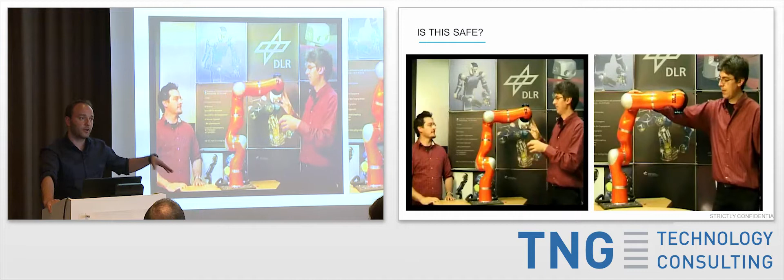And the problem was that there is no robot that can give you force feedback. So did you actually turn the lever? You could not give this response. So the idea was to create a robotic system that has some sort of force feedback. And the first application, what you see in those videos, is now copying human abilities. And human ability is behavior. So we can suddenly create not only a position, a stiff motion; what we can do now is to make the robot compliant, or you can make him stiff. And all that by control.

The problem that actually arose from this video, one of the first videos that showed a robot and a person in the same workspace, right? This video is, by the way, from 2006, and this young man is my brother, and I was filming during night time because we were not sure what's going to happen. And that is actually the question, is this safe? This became a much more prominent topic than we ever thought of, and by now we talk about something in German called MRK, Mensch-Roboter-Kollaboration, or human-robot collaboration, which became, under the title of cobots, the main issue. So is this safe or not?

But the idea was never just to make a fenceless robot, but to create a system that is capable of more things, and not just to remove the safety fences. But obviously that is a very critical thing. So what was the next step? The next step was to introduce robot reflexes. When you put your hand on a hot plate, you do not need any higher computational power in your brain to remove your hand, you just do it. It's a very rudimentary reflex, a spinal reflex. Without thinking about it, you're going to remove your hand. And basically that is what was introduced into robotics. This is the so-called collision detection.

And what we see here are now high-speed collisions, roughly 2 meters per second, or even low-speed with a knife. We drove here with 0.75 meters per second, and my brother's arm is still functional, more or less. So this was the next step. I mean, copying biology is usually quite useful.

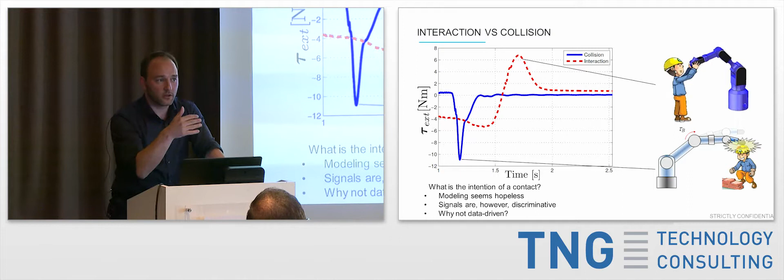Okay, so what I initially quickly said is collision detection is not that difficult. Actually, what you do, you just compare your input with your output, right? All robots basically have a joint which has a motor which gets power, and you have a current sensor on the drive side, so in front of the motor basically. And when it collides with something, an energy peak is detected, which is then different to what I put into the machine. And that's how I know something collided with the machine.

But the idea, as I said, was never just to introduce collision detection as a binary function, so yes or no, because then your robot would just stop all the time. So what we did is develop a torque sensor, a real measurement of the real external torques and external forces, and put it on the far side of the motor, so we can measure the real external forces and external torques. And why do we do that? Is what you see here.

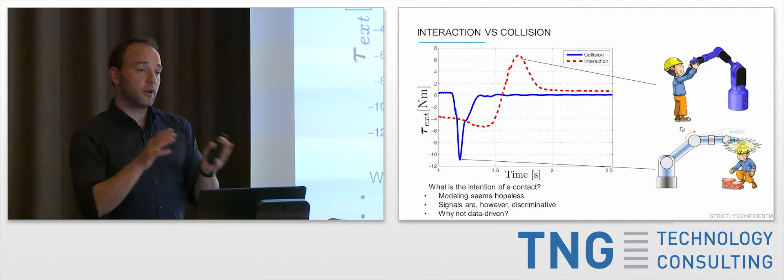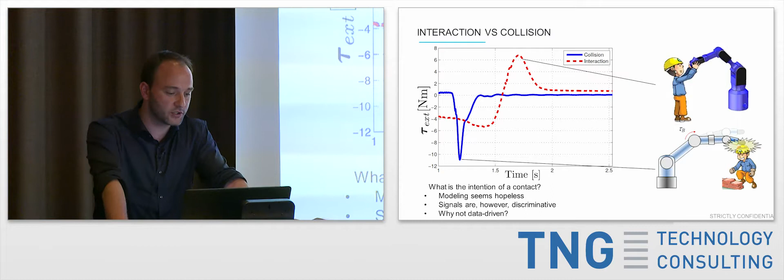And this is now where learning and all the big words that are thrown around these days come into play. All we do in the end is have a torque profile over time, right? Because we tried modeling all kinds of different situations so that the robot would understand whether this is a wanted collision or an unwanted collision. But it was almost hopeless, so we tried with experiments. So data-driven, collecting torque data, collision versus interaction, so the machine understands whether it is a wanted or an unwanted collision. And then I show you the first experiment of such kind.

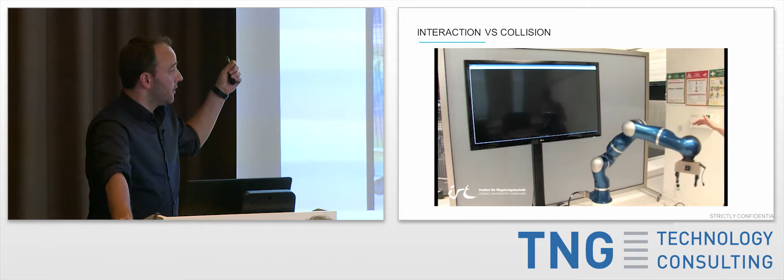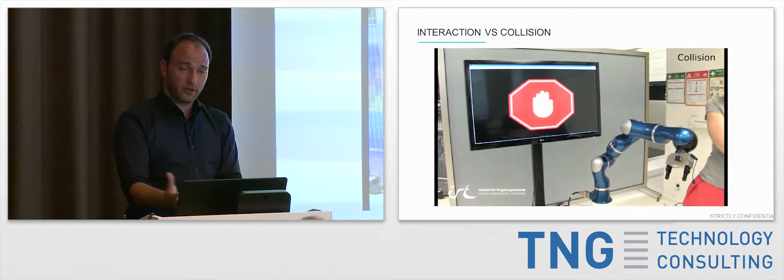So the robot understood now that Saskia was grabbing him with the hand. And now he understood that it was not an intentional collision. And this is, let's say, the second generation of differentiating collisions. Later I'm going to show you, because manipulation, interacting with the physical world, is a constant collision. But the robot needs to understand whether this is wanted or unwanted. Let's say he's used in an assembly task, putting together a computer. It's constantly colliding, but he needs to understand this is on purpose. And I'm going to come back to this point in a second.

So this is our robot, which we developed over the past 6 years. We started mass production last November. And as Marie said, we had been graced with awards from the German federal president, but also in the US, Popular Science or the Edison Award, because what I'm going to show you in a couple of seconds is quite a breakthrough in robotics. So what are the key features of the system? First of all, the usability.

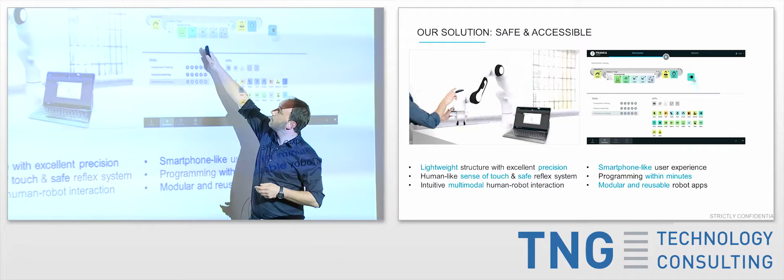What you see there on the right side, you don't write any lines of code anymore. We introduced something everybody knows from the internet world or from classical IT, a hardware abstraction layer. So you do not need to write any code anymore, but we created skills and apps which bundle functionalities, and in the end you just drag them into your timeline and push play. So what we see here on this side are all the apps, just like on your smartphone, installed on this very robot. Here you have the timeline where you put all your apps together, and this is where you can store them.

And what we see here, for instance, is the programming from one of our major cases, iPhone quality control. These functionalities are interacting with the person, opening the smartphone by pushing the home button, putting a calculation into the calculator, and closing the iPhone again. It's a typical end-of-line testing of a manufactured electronic device. So you don't need any special skills anymore to program a robot. And we actually opened up an academy at our place where we invite basically everyone who's interested, who has never programmed or who has experience in robotics.

We have even school children from 8 years old using this. We did a statistical analysis, and what we figured out is that 7th graders are now only 20% slower than a postdoc in robotics at programming this robot. And that's only the relative time - we actually reduced the absolute time from weeks or months to minutes.

2 or 3 weeks ago at Hannover Messe, we made a live setup of the robot. It arrived from an Amazon delivery and came to me. Together with our Minister of Digitalization, Frau Bär, she was actually able to set up everything within 5 minutes with an audience similar to this crowd, even though she was sweating and red, but it somehow worked.

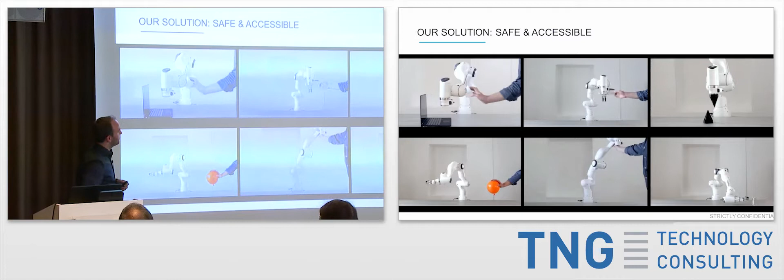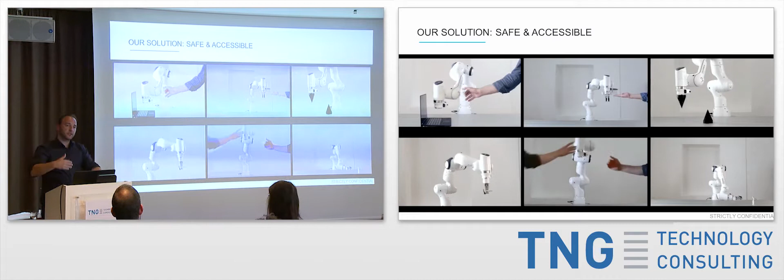Here I show you a couple of cool features - it's a bit older prototype, but was still functioning. What we see here are something called virtual walls. We can introduce spaces where the robot is not allowed to go into, even though you throw him into it. Basically he bounces back, because for instance you don't want the robot to destroy the screen, so you put a virtual wall.

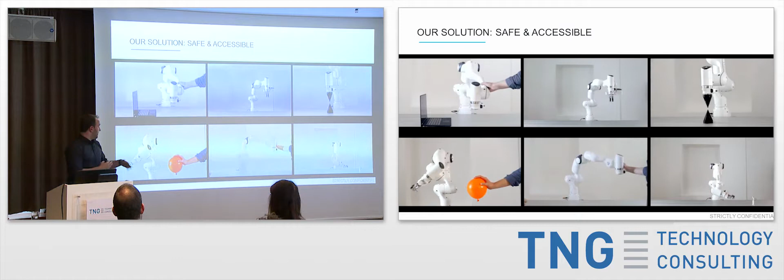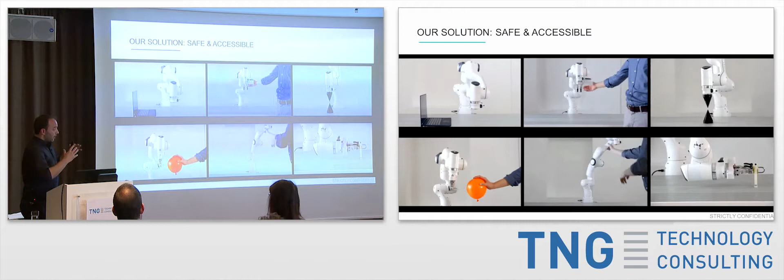Another thing is the sensitivity. What we actually see here on the video below is a nail driving into a balloon, and the balloon does not burst because the robot stops that fast. That is one of the most critical things which a lot of stakeholders going into robotics worry about, because robotics is quite a hot topic now.

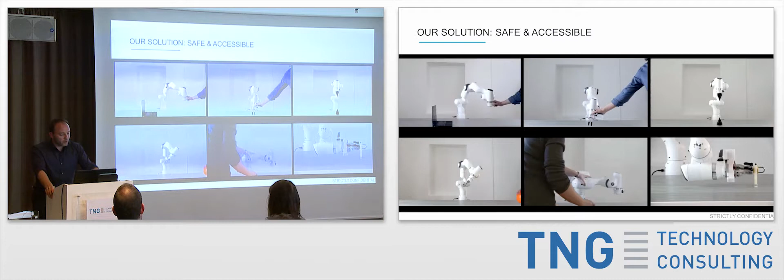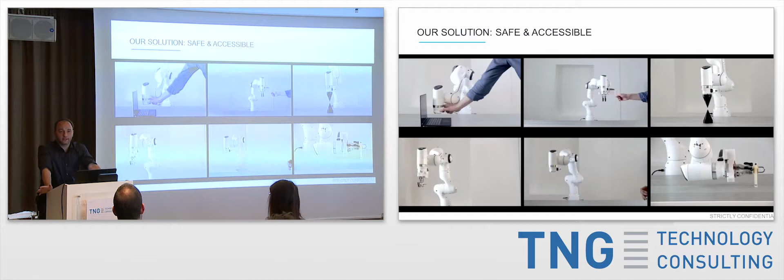The problem we have with real machines is that real time in robotics does not mean, like I saw before at Oculus, 90 frames per second - we were talking in kilohertz at least, so 1,000 signals per second. Why do we need that? It's because the human has the spinal reflex to protect myself - it needs 80 to 100 milliseconds until I can actually react to a danger. That means your machine must protect you in that delta time, otherwise it has no meaning because the human could react already.

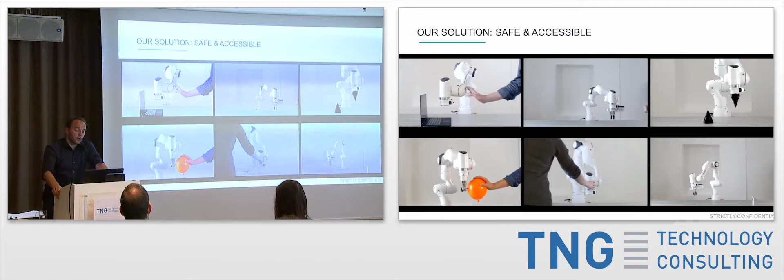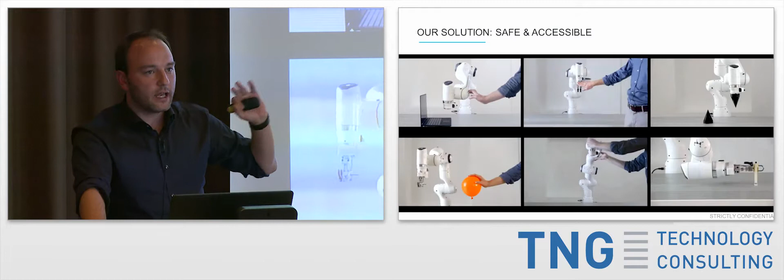Now comes the tricky part - let's say we connect all these robots to some cloud. The problem is still the latencies. You cannot use any cloud connection today which will give you information in the time you need it to react, because we are talking about different digits of velocity or frequency we actually need here.

As I said, that was a prototype, and now I'm going to show you a cool video of super sensitivity with the balloon - this is our newest version. It still works, but what we can do now is blow against the robot, or even throw the balloon against the robot. The sensitivity is so strong that it even feels single grams of contact.

Why is this even possible? We have in each joint, so in all 7 joints, something called a torque sensor, which is nothing else but - when you take your finger and overextend it, you have torque sensors basically in your muscle tendons. That's how your body realizes that you are using or overextending that finger. And that's the same thing we introduced now into robotics.

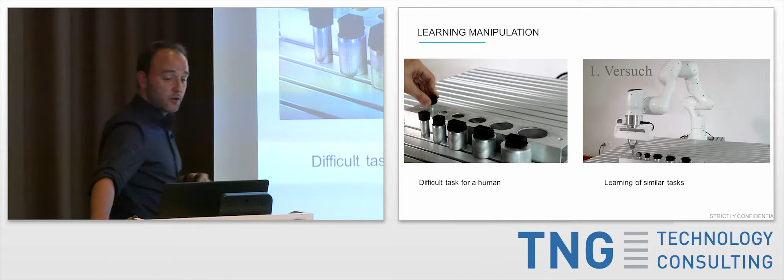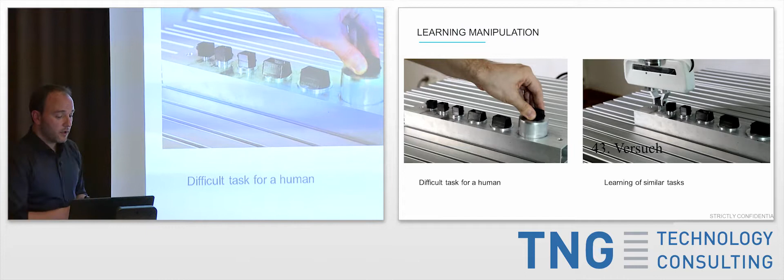What can you actually do now? That's where we come into the nice videos. We can learn manipulation. What we see here now is a typical robotics problem - sorry if the videos seem a bit strange, I have a new laptop and did everything on Apple, you know how it is. This is peg and hole - inserting something that is quite difficult to insert a peg into a hole. You see the human needs a couple of seconds for each of those.

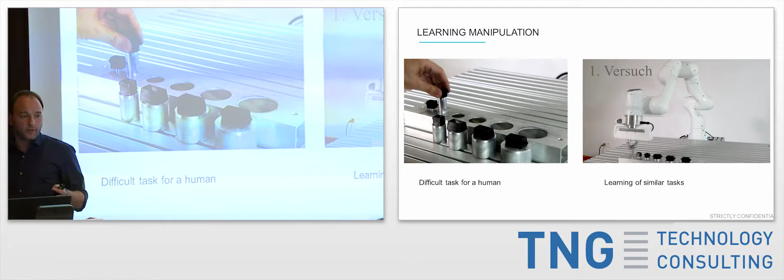What we see here now is that the robot is testing itself. Nobody programmed that robot - the robot is trying to complete this task by himself. What you see is that at the 12th trial, he's already managing. At the 26th trial, he's getting a bit faster.

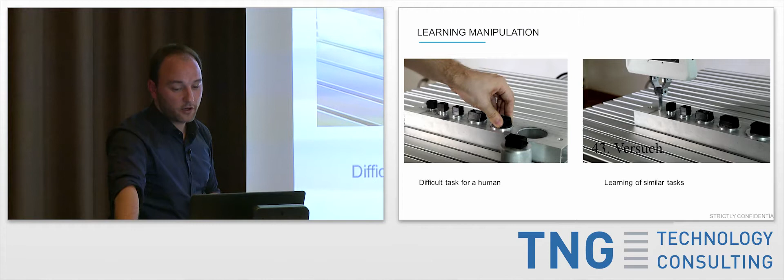And at the 43rd trial, I think he's going to manage now really fast. And that is actually industrial quality. So we can, without anyone ever programming this robot, do insertion tasks without programming them.

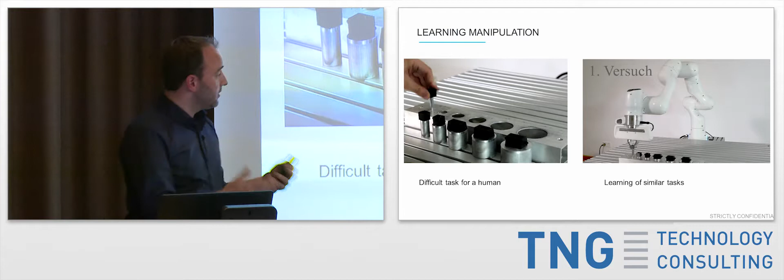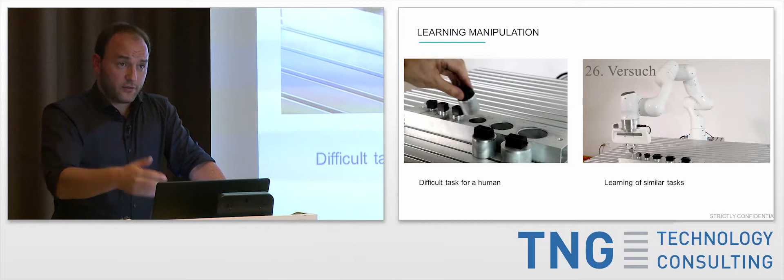And then comes this question of strong and weak AI. I'm not sure if everybody knows, but weak AI basically means I solve one problem, like face recognition, and I can recognize faces, but to transfer that knowledge to a different problem, even a similar problem, is still very difficult, very far from actually happening.

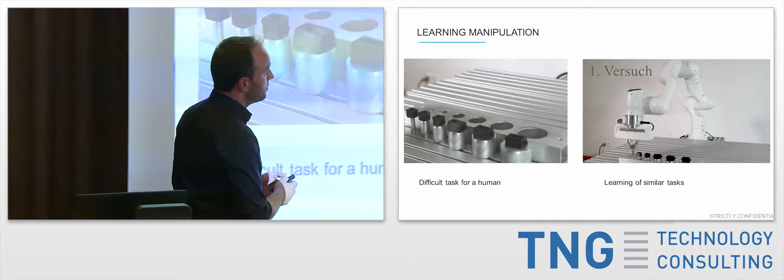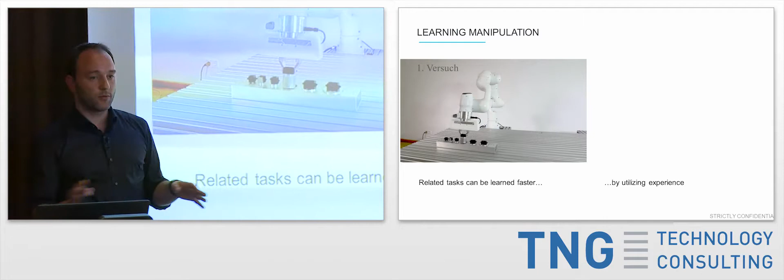We did the very first experiment of that roughly 10 years ago, so the hand you saw initially. 10 years ago we did that the first time, and the human back then was the son of our boss. He was, I think, 6 years old or something, and he was way faster than the robot. The robot took almost 2 hours for this problem, and the son did it in a couple of minutes.

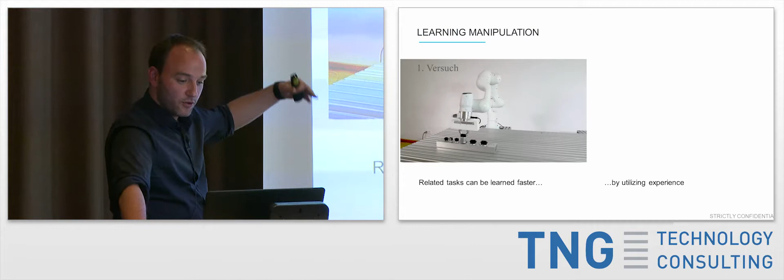So when you have a machine of this kind that is capable of learning manipulation without any programming, he can just try it out himself. What do you actually get? You get a multifunctional tool in the end, which can do things for you that you maybe have no idea how to do, but he can try to solve them. And that is the opposite of automation today. Automation today is 100% special solutions, everything is a single application, and there's no way to transfer that knowledge to a new problem.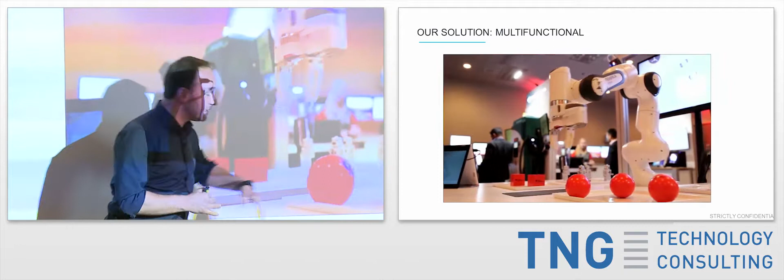I'm not sure if there's an after party after this conference, but if there is, you all know when you get home and you're a bit tipsy and it's dark and you're trying to put the key in the lock, right? You don't see anything, but you will still manage it. And that's what we're doing here, basically the exact same thing.

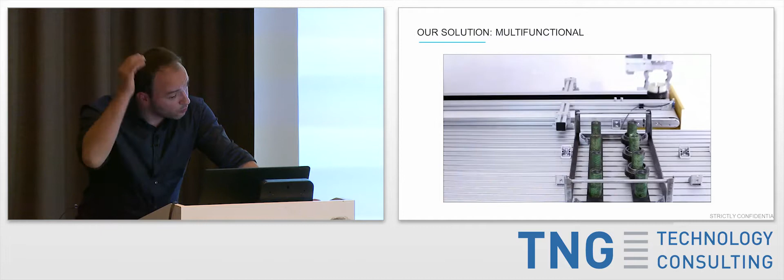Okay, this is maybe important to see. What you see now, the colleague just moved that little tray, and for a normal robot it would be impossible to execute the task. But look at what he's doing now, just like you would do it, right? You're trying, we call it wiggling, so you wiggle the workpiece into the target area.

And the same accounts for a CNC machine, without any issue, so we can use tolerances. The world is filled with tolerances, because everything is not in the same place all the time. And then we can solve problems like computer assembly, which is 100% manual labor, mostly in the far east of this planet. What we see is that a single robot can remove the dummy, insert the real CPU, close the lid, right? And we do this blind, that's very important to understand.

That's why I'm calling it the art of manipulation. So we are heavily engaged in learning that the robot, without any eyes, can solve many, many problems. And what you see now, he puts the cooler on top, and the second robot comes now with a screwdriver and will fix the screws, I think. Should.

So one pushed it into its press fit, and then the other comes and tries to screw those screws, but not in a single way, because he understood that when he inserts the first screw, he won't manage to put in the other one. That's how he learns to get better at these tasks.

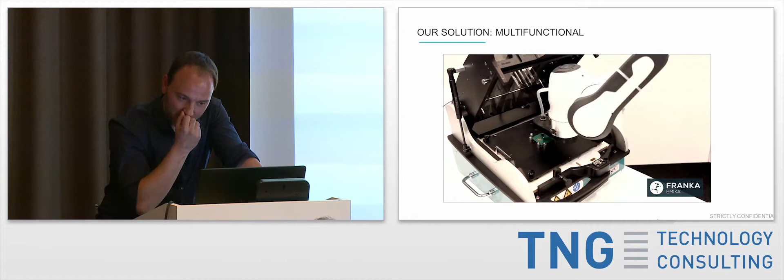You have a robot, and I'm showing you this because I told you I'd give you a quick sneak preview into our own production. These are some of those cases. In the end, these are our control boxes, our control computers, being assembled. This was at Hannover Fair last year, and here the robots are assembling their own computers.

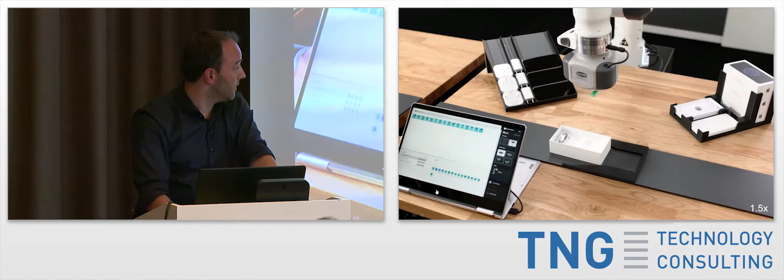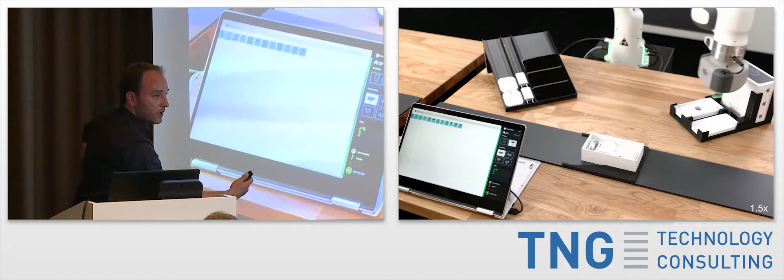Here I show you quickly how the interaction with the robot actually works. You basically show him a couple of process parameters—this is again from smartphone production, end-of-line packaging. Within a couple of seconds—this was at a fair so it's sped up by a factor of 1.5, but you could do this in reality just as fast—and now, without any programming, the robot was able to do these tasks. You just put some of those together, and you see the line going through all the functionalities he has to do.

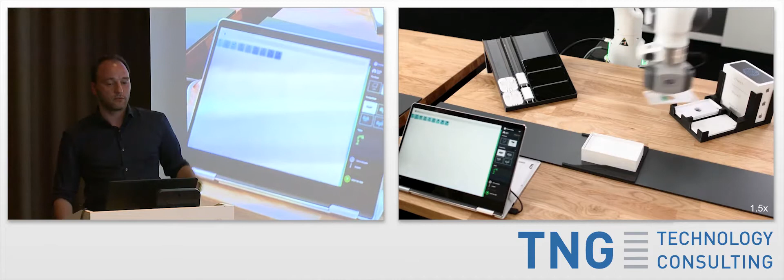Once you pack the smartphone, you want to pack it again to ship it with Amazon Prime. Everybody knows pick and place, but what we do here is pick and place—what we call sensitive sorting. You see how this robot puts this together, doing it just the way we would. Without any cameras—this is important because, as you know, everybody knows the problem of bin picking combined with some sort of perception sensor. It's still a mess, to be honest, but someday I hope it's going to be solved.

Now I'm going to show you a couple of sneak peeks from our manufacturing. This was a prototypical implementation of assembling the joints, or assembling the robot itself. On the right side is our manufacturing line. What we see here—we're targeting, as I told you, what Daimler, the car manufacturer from Stuttgart, has, which is 25% automation. What we're talking about here is almost 80% automation.

And why is that critical? It's critical because our robot is not manufactured in China or somewhere like that. It's manufactured roughly 80 kilometers from here, in a former Siemens factory which they left because electronics manufacturers are leaving this country, saying it's too expensive. But if you now have a few people and a lot of robots, which cost 10,000 euros, you can suddenly manufacture electronics in Germany again. I think this is one of the most critical things for us—that we're capable of going into competition with low-income countries. The system is called Panda, as I told you, and our manufacturing line we call Panda Square.

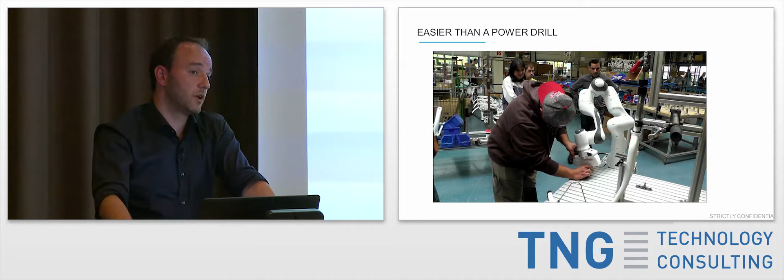A nice project I always want to show real quick. I don't know if it's famous internationally, but Puky—these are kids' bikes. My son, for instance, learned to ride a bike on a Puky bicycle. That's why we did this project, to be honest. I did not know that Puky bikes are assembled in workshops where disabled people work. They basically assemble all the bikes, but they have one major problem: due to their physical or mental disabilities, they have major problems with screwing—they don't have the proper sensorimotor control, so they always hire external workers to finalize the screwing. So we showed the guys how to use the robot, and the robot is now taking over the screwing applications for them. This robot is easier to use than a power drill, basically, and that is pretty cool.

Quick overview: all these applications you saw, we developed together with our pilot customers. And what is it we actually sell? I told you we're selling robots—mechatronics, grippers, and robot arms. But we're also selling the software packages for it, all these functionalities like screwing, inserting, picking, placing, connecting to a third device, and so on. Then the third thing, which is most important, because few people know this, especially those with no idea about robotics—the problem with a robot is that when you buy one from a robot manufacturer, you don't actually buy a machine.

You buy a so-called incomplete machine, which probably none of you has an idea what that means. When you buy a vacuum cleaner, there's a CE sign on it, right? That CE sign means this is a machine you can take out of the box and take into operation. The problem with these incomplete machines is that you need somebody else to do a risk analysis and all the engineering and programming to create a so-called complete machine out of it. What we did, basically with a lot of features and functionality, is create complete solutions which are shipped with the CE sign. So you do not need any third person anymore. You can just take the robot out of the box and take it into operation, which is quite an advance. And then we have just a quick overview of some customers.

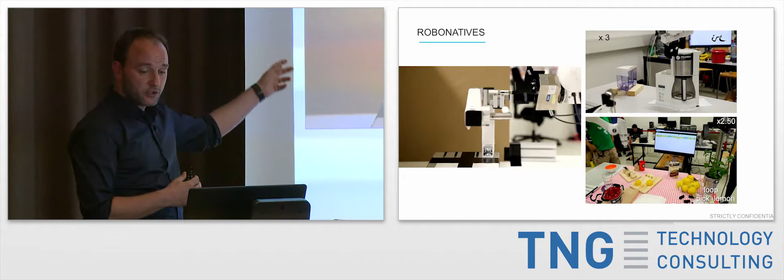So what we do here is we always do robothons, where in this case we had bachelor students that have never seen a robot in their life, and they had 4 days to solve home assistive tasks - opening a door, making lemonade, making coffee, and setting up everything in my house, making waffles and all these things.

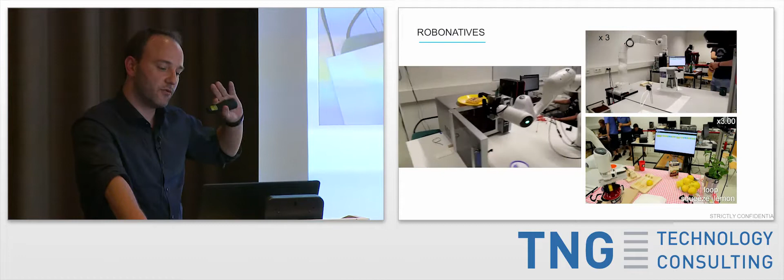And they did that without any prior experience, in 4 days, including setting up the end effectors. Of course it's all prototypical, but this is the level we've reached now - people with no idea about robotics can use a real robot and not just a toy robot.

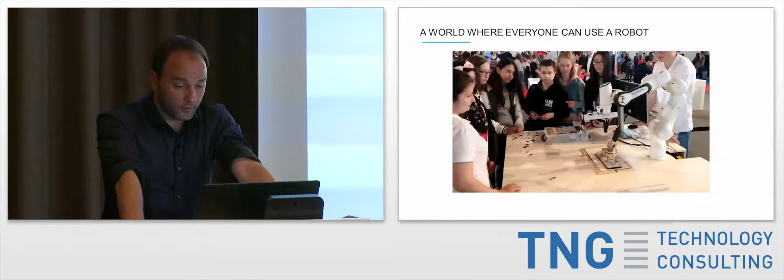And then they went to the major fair. These were not even university students, these were school students, and they programmed these tasks - for instance giving away little buttons - and showed that at the Ideen Expo, which is basically a kids fair.

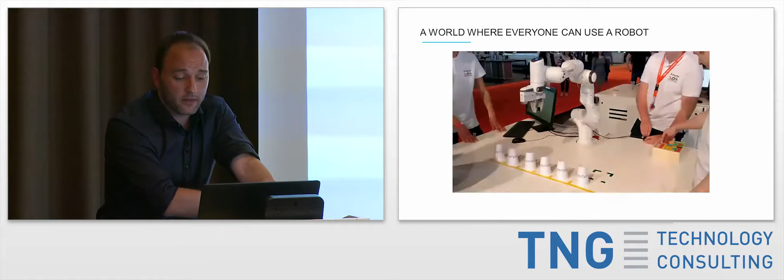If we manage to get as many people, and as early as possible, onto these technologies, then I think the impact that robotics will have will be maybe multifold bigger than what happened with smartphones, because this is now real-world applications, not only ending on my computer screen.

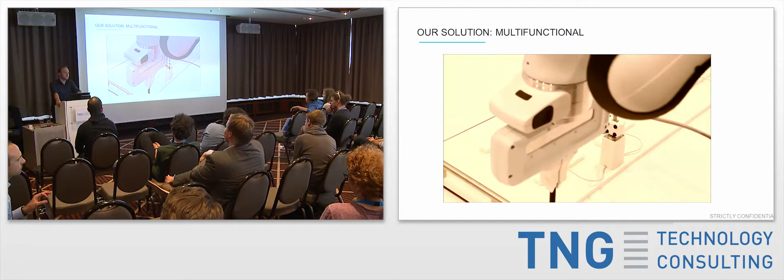And the second one is: do you think it's possible that the robot will change the diaper of a baby, for example? And in how many years will it be possible?

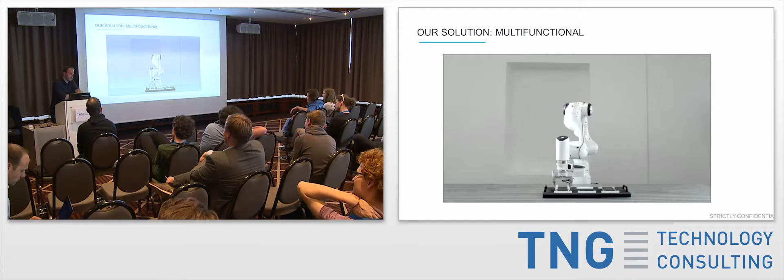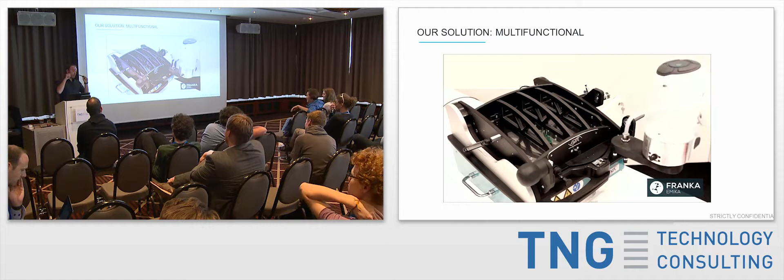So, I mean, as I said, we are heavily working in those service applications, but actual caretaking, what nurses do, or similar problems, what you're talking about, I think this is for a long time a human task because it's too many variables. For a robot, we have two major differences. We have a stiff object, which is no problem, but what you're talking about are flexible objects, biegeschlaffe Teile.

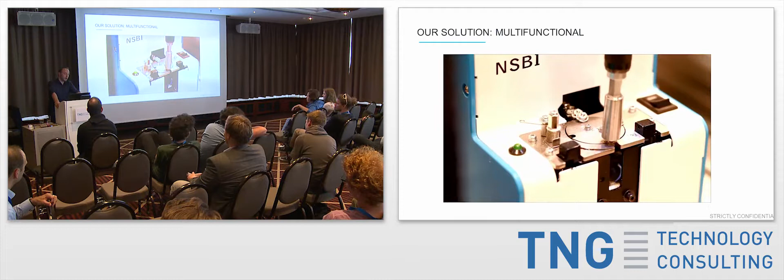And it's really difficult, and today impossible, to manipulate properly. Of course in a single case you can show a nice video or something, but that it actually works all the time, I don't know. If you ask me, I think decades or something like that. We are the manipulators, right? We're not perception guys. We're not heavily focused on, let's say, object recognition, detection, cameras and all these things.

There's still major problems with all devices. They are still not stable enough. It's difficult to calibrate them. So we have a feeling robot now, but we have this type of feeling, right? The human has two types, this one, and then the tactile in the fingertips, in the skin actually, and that we still don't have, and I think it's a bit far away until it works properly. So it's gonna take, I don't know, 10 years. More than 5 years is really difficult to see what's gonna happen.

Sorry, thanks. You were saying really cool tech.

I'd like to learn a bit more about the learning capabilities of the robot. How much of it is built on classical control algorithms, and how much is built on things like reinforcement learning? So basically, what you see there is reinforcement learning in general. But what is the major problem? We tried a couple of very famous neural networks just to create the model of the robot, the physical model.

Because a normal robot, when it stands still, the brakes are holding it in this position. But these types of robots don't have any brakes anymore. They have something called gravity compensation. So they are just standing, basically holding, like you hold your arm like this. And with the neural networks, creating the model that will just keep the pose, we did not manage. The robot fell down all the time. The problem is that these neural networks completely ignore physics, and that's the key issue, actually.

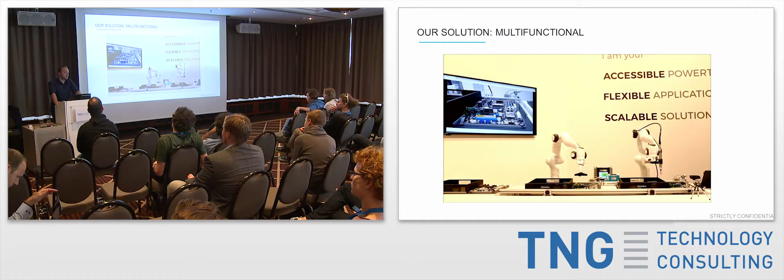Because in the real world we have gravity and we have weight and we have momentum. In my opinion, it's not possible to solve it without any controllers, without any models. You need to give constraints. Otherwise, it's just not going to work. And you see that in a lot of clips, especially from the US, so-called learning whatever, where a lot of things just don't work. I think it's because they are disregarding physics. In the manipulation, the basic controller and the models were running, but learning the task was completely reinforcement learning, basically.

Right? Hi, thanks for the nice talk.

I was wondering how much of your control is digital and how much of it is analog? Because a digital control is much more apt to being modified. An analog control is, for example, our nerve, where there's no representation of the signal into a digitized manipulable code, but it's really directly the raw signal which generates our reflex. A digital control is, okay, I have the torque signal, I compute something out of it, and I generate again an analog control. So is there also an analog safety mode in your robot? If I change the code of your robot maliciously, would it still stop?

Ah, okay. So there is a part of the control, and that's the safety, which, if we give you admin access, you would be able to change. But as long as you're working, because basically how does this work? In this type of programming, obviously you're very limited in functions. You cannot change any functionalities, especially not the safety. But this is running basically in Chrome. So you can go into these individual apps and also start writing code actually. But even that code will not overrule the safety of the robot.

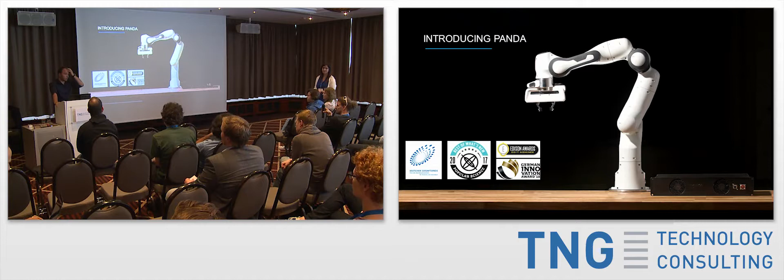No. But basically, as we're talking about here, we're not programming anything in machine code anymore. We are talking about basically a distributed service architecture. And what you do, maybe we see it somewhere, I think in this one video. So basically, you can write your own service, and we give you the templates. Maybe we have one here.

In the end, you can write your own service which connects it to a third-party sensor, for instance, the perception sensor, to give coordinates to grasp something, or to give a command to a second machine, like a conveyor belt that gives a signal. So you can create those services yourself, and it's not really difficult. And you can use most perception sensors.

And that is actually related to what I wanted to ask in the video where it was packing the boxes. How does it know where the next box is located? Because you only showed once where to grasp the box. Yeah, sorry that I'm jumping here now, but it's always easier to show. This one you meant, right? No, the next one, I think.

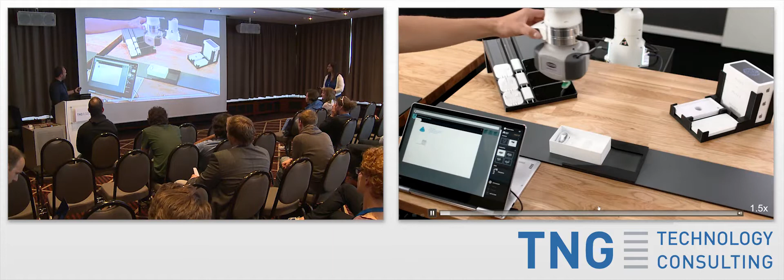Those. So what you told the robot is that this is not just one package. You gave him a pattern, and you can do this pattern 4 times 1, but you can also do it circular or square 4 times 4, and then he just knows. And you don't need to program these positions. You just tell him the first one, and then you say there's more coming, and he will just continue.

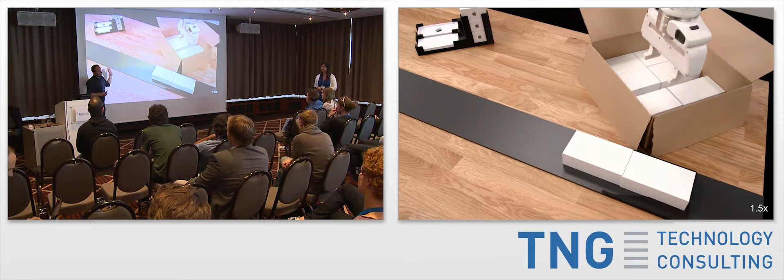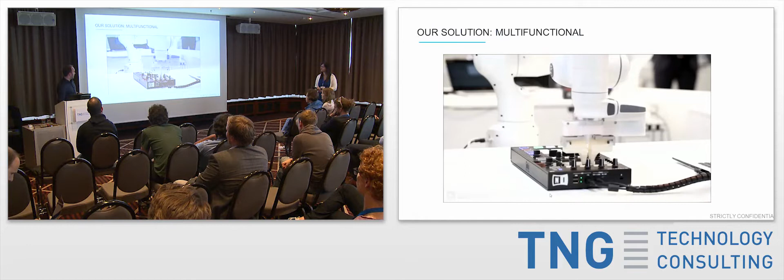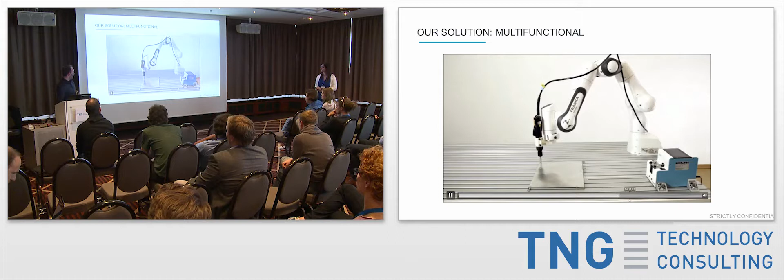And you can even use him, as I can show you in this example, as a passive conveyor, we call it. So the robot is actually dragging the workpiece into his own workspace. Wait, I think it's coming after this one. Sorry. Then it should be after this. I'm sorry. Or maybe it's not in this video.

So basically, there it is. Here we have a stack, and the robot drags the workpiece into his workspace, and then he just knows. And the problem is, because we have a 7-axis robot, we have 7 degrees of freedom, and those motions you cannot do with most robots, because they have 6 degrees of freedom, but you can either take it yourself or...

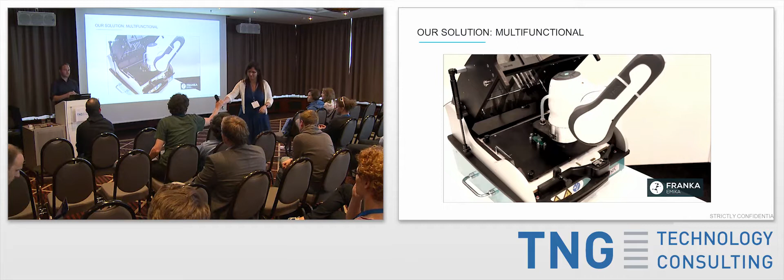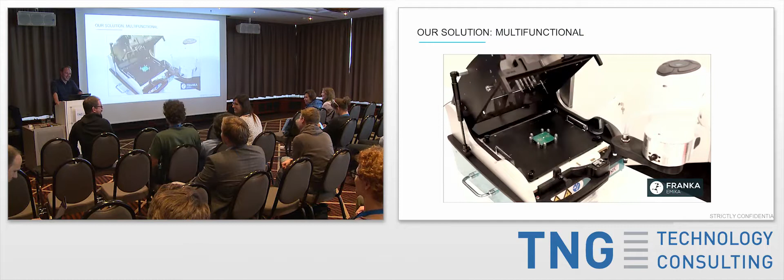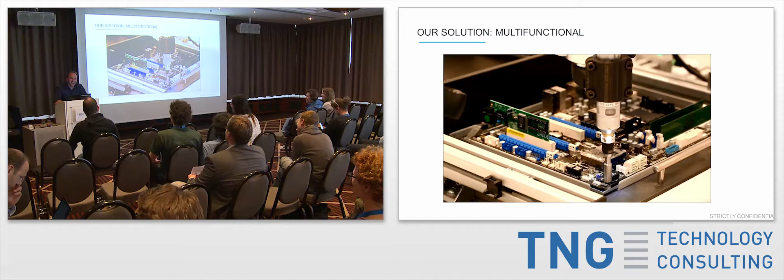So what happens if you put a pendulum at the end of the robot arm? To do what? Just to see the scientific reaction. So then you get a torque, so it maybe starts moving later, then the robot arm moves to the left, and then it overtakes it if the robot arm stops, and does a push. So you never tried something like this? I really did not understand what you're talking about. Okay, sorry. So you have a robot, and he has a pendulum in his hand. It's moving differently than how the robot moves it, and then you get an additional torque at the end of the movement.

Okay. I think what you're actually asking about is dynamic measuring of the weight, the center of mass actually. Sorry. So basically, it's a similar problem. The robot grasps this, and then he grasps this. This is, I don't know, 50 grams. This is a full glass, 200 grams, right? This is, I think, the question. Is it? No? So maybe you have a full glass. Yeah. So you start moving it. Yeah.

And the water will get in motion. Yeah, but that's what I mean. The center of mass is changing, and whether the robot can understand that. So with the glass, yes, but there's not too much happening. With the pendulum and, I don't know, 2-3 kilograms, I think it's going to be difficult.

But what is possible is, so what we do, how this actually works, also how are the robots taken into operation? Because today, when you buy a robot, let's say you're a Volkswagen dude and you order a robot, the first thing you do is actually create the model of the robot. You have to do it because the model of it and the actual model are two different things. So the motions are quite bad. So tuning this is the first thing you do. But we do this already in the production.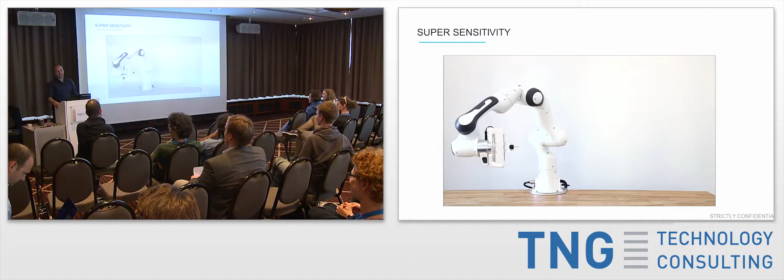What level of precision can your robots do? So that's a really important question, because that's the first question every classical automation dude asks. And it's an important question because a classical robot is a stiff machine, so he relies on heavy precision, right? So the entire street needs to be absolutely accurate by micrometers, basically, and then he can manage it because industrial robots have a repeatability of 0.1 millimeters, right? That's the ISO standard.

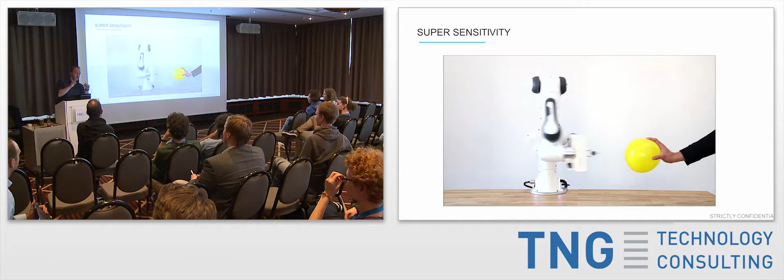And we have that, but now comes the trick question, actually. Why can a standard robot not insert this HDMI cable into the socket? Because there's tolerances always. So the precision is not enough to hit this HDMI cable, except it's exactly at the same position all the time and not even a little bit turned. But why can a human without 0.1 millimeter insert the HDMI cables? Because he can feel. So you have actually a much higher precision.

Even though you have 0.1 millimeter precision, you have additionally the capabilities to compensate tolerances, which is really the key issue. Yeah. So 0.1 millimeters, we did that. You have to. When you want to sell an industrial robot, you have to do these laser measurements, and yeah, we have the same as a classical robot.

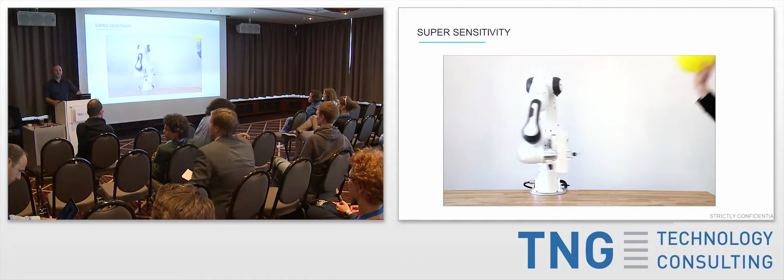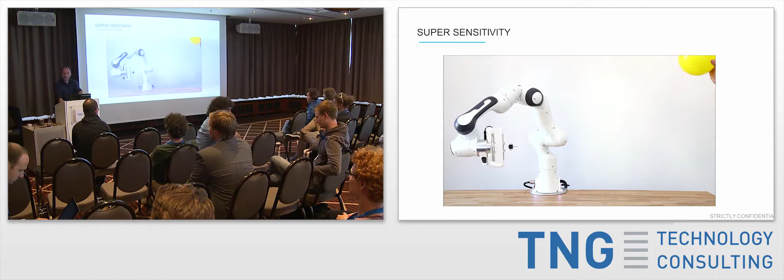Hey, so my question is about the hardware approach that you choose. Could you stand up? Because I don't see you. Ah, yeah. Hi. So what do you think about the approach that, for example, Fanuc chooses to make their cobots, that basically you take an industrial robot with a payload of 35 kilograms and put just rubber skin on it? So the problem is, and that's why we did these tests, I don't think it's an appropriate approach, in my opinion, because what you see here, again, we're talking about physical moving objects, right?

And those robots, they weigh roughly 100 kilos to 1 ton or something. And now we're back to physics, right? You have a mass that is moving, that gets momentum, and even if you have a super fast collision detection, until that 200 kilo robot stops, it just takes time. And that's why we did these experiments, to show even though you're super fast, no way you're gonna beat the momentum in the end, right? You need to stop. And that's why I think it's very dangerous to show those robots without safety fences. It gives a wrong picture about human-robot interaction, in my opinion. Even though those are super good robots. But.

Additional questions? Oh, okay, in front. I think I have the last talk, or? So we have time till tomorrow.

For the robot in my house. So would it be possible to add, for example, a laser cutter attachment or something, or like a CNC attachment, and you actually make it do stuff that other people do, I don't know, in Fab Labs, and basically make this do 5 things that you would need 5 different machines for right now.

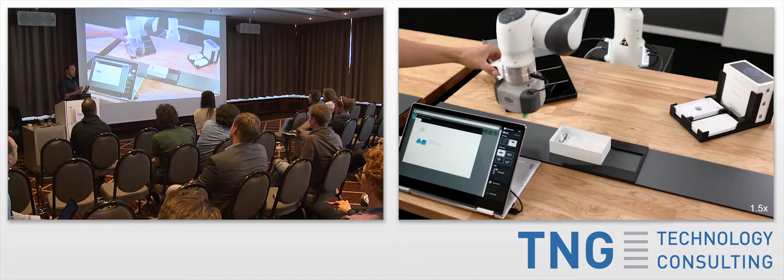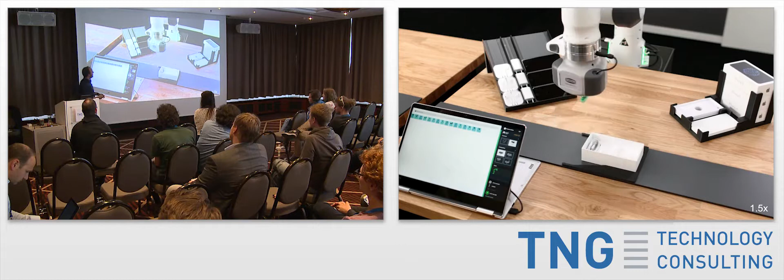The idea is that, as shown in a video with our gripper, you can attach different devices to the end effector—for instance, a suction device. Most devices are just I/O, on and off, super simple. As long as what's attached physically matches, or you build an adapter, you have the EtherCAT connection, so basically anything with Ethernet can connect. And you have 24 volts, which is enough for most devices you need.

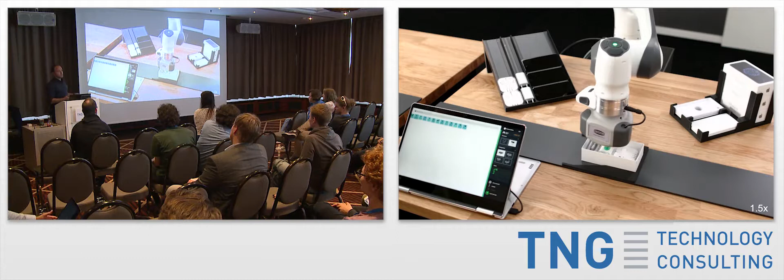So now there's a lot of arms again, okay.

Do you think your robot is able to replace a barista in a coffee bar?

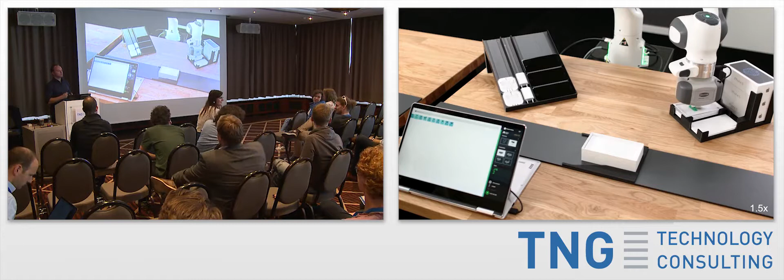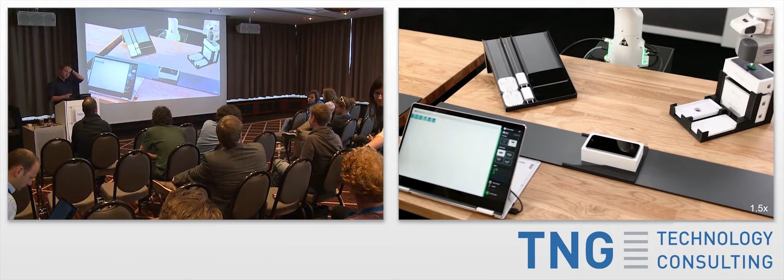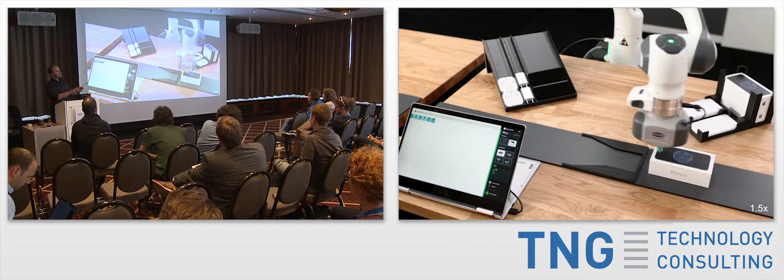We started an academy where people come to our place, learn how to use the robot at these stations. The second academy, back in September I think, had a guy from the Bay Area who wants to do coffee shops—maybe it's already opened, I haven't been there, but it's going to happen. But always to some extent, right? Until a robot can handle these complex tasks that I can solve as a person, it won't fully replace someone. Somebody asked about diaper changes before—these are super complicated things, and we're far away from solving them, no matter what Elon Musk says.

Have you thought about making him move himself, like adding wheels or making it mobile, something like that?

So mobile, yeah basically. What I said before, we have a 7-axis robot, which isn't just one number more—the actual problem is that you get the so-called null space. It means you can reach a point in space with different configurations; the arm can be like this, like this, like this. That's the control problem behind it.

If you attach another mobility element, you get more dimensions. That's actually how we want to approach the problem, because we don't want the platform to move independently of the robot, which is what happens today everywhere—robot and mobile platform have nothing to do with each other, basically like two separate machines. We want to solve these problems always as control problems, as one body moving in a certain way.

Take the simple example of a linear axis where a robot is attached and can drive from A to B to different stations. What you see today is it drives, stops, gives a signal, then starts. But if this were, say, an 8 degrees of freedom robot, you'd actually start moving already while approaching, just like a person would, giving a super smooth motion. We're working on these things—give us a year or two, then it's ready.